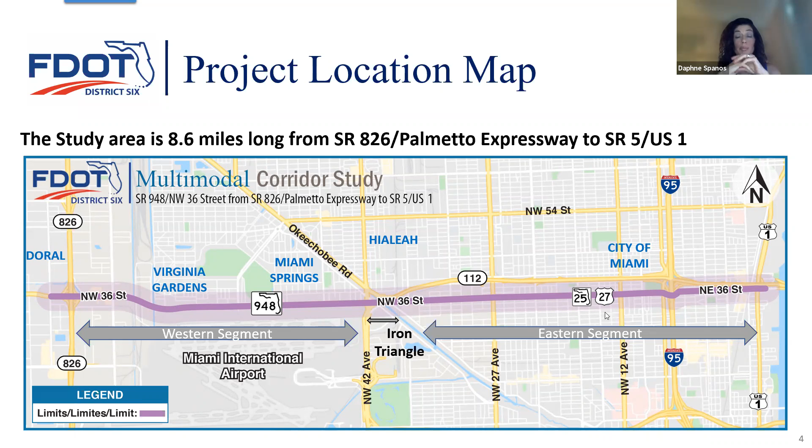But we start to see trends in these previous studies. A lot of them focus on optimizing the operations of the corridor, signal retiming, and looking at connecting the highways 112 to 826.

There's also freight studies relating to the corridor, as well as the county's long-range plan, the City of Miami master plan for bicycle and pedestrian, as well as the I-195 study, again a similar effort of FDOT.

Another member stated that the improvement should go further west than the Palmetto Expressway. Another TPO member asked if State Road 112 would be extended, and suggested extending over Perimeter Road instead of along Northwest 36th Street. There were also comments about keeping transit and bike lanes and support for mid-block crosswalks.

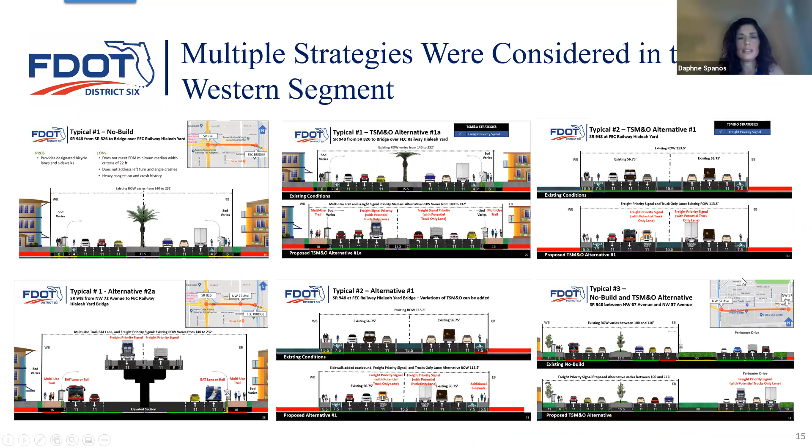So we're not going to go through all of these tonight, just showing the process of what we followed and what we presented.

In the eastern segment as well, we showed, I think, over 8 strategies in the eastern segment from 42nd to US 1, and then in the previous slide in the west, we showed about 15 strategies.

So from those strategies, we developed a preliminary matrix to see what strategies could possibly move forward for the purpose of our traffic modeling and following the rest of our engagement process as well.

Now you can click there. So we're going to discuss the alternatives. I see I'm on slide 12 and I think I have about 30 slides, so I'll try to be a little quicker, and then at the end, if anyone has questions, we can go back.

To summarize the alternatives, we have a no-build alternative, a TSM&O alternative. What we're calling a capacity build alternative is a 6+2 elevated section, and we're looking at that from 826 to Lejeune. Then a lane repurposing build alternative, again for the eastern segment, basically from east of Lejeune to US 1. In the middle piece there, as mentioned, the DOT has a separate analysis of the iron triangle of State Road 112, Lejeune, and 36th Street, and how that intersection operates. That would have to be integrated or looked at with any of these options.

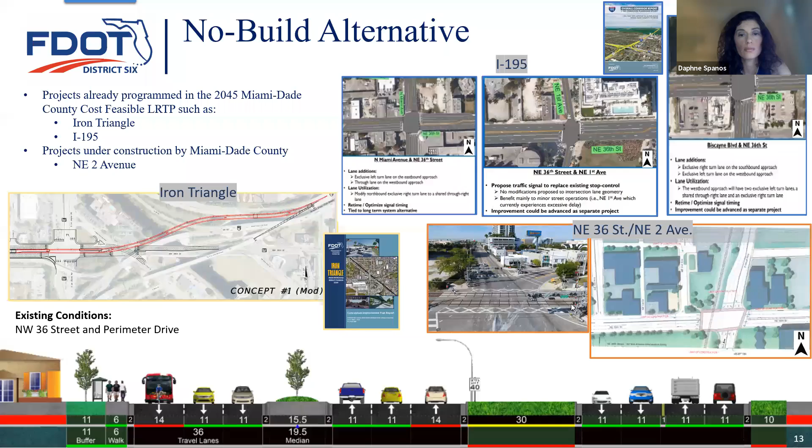So the alternatives are the no-build alternative. I forgot to mention the purpose and need of the study. The purpose and need looks at mobility enhancements, economic enhancements, safety issues, and accommodating all modes of travel.

For a no-build alternative, we could see that obviously it would be less costly than doing any build alternatives. It would be supported by Virginia Gardens and Miami Springs and less disruptive. The cons are that it does not address the full component of the study's purpose and need or future traffic conditions, which are showing to be failing in the West and in many portions in the East. And it wouldn't improve bicycle and pedestrian conditions, as well as the numerous high crash locations along the corridor, which are particularly located between Lejeune and US 1.

Next, we're going to describe the capacity build alternative, what we're calling the 6+2 elevated section. This is a rendering—whether a potential elevated section is in the median or the south side could be further explored. But this is what we're analyzing throughout this study process and modeling in terms of the traffic, looking at on a micro level how the intersections would be functioning. So this concept, in our study process, looks at from 826 to Lejeune, an at-grade six lanes on 36th Street with 2 lanes elevated.

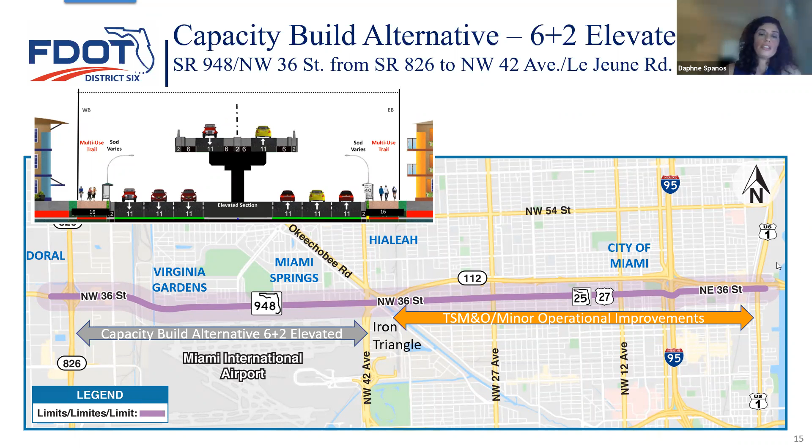I also should mention—well, I think the next slides will cover some of the points—this is just some conceptual renderings of how this could potentially look and how it could tie into the Palmetto Expressway, as well as how it would look along the Miami Springs and Virginia Gardens section. Obviously, if the section could have right-of-way impacts on the north side, unless the study team can tighten up and refine the concepts, they could potentially fit within the right-of-way, or there could possibly be right-of-way impacts.

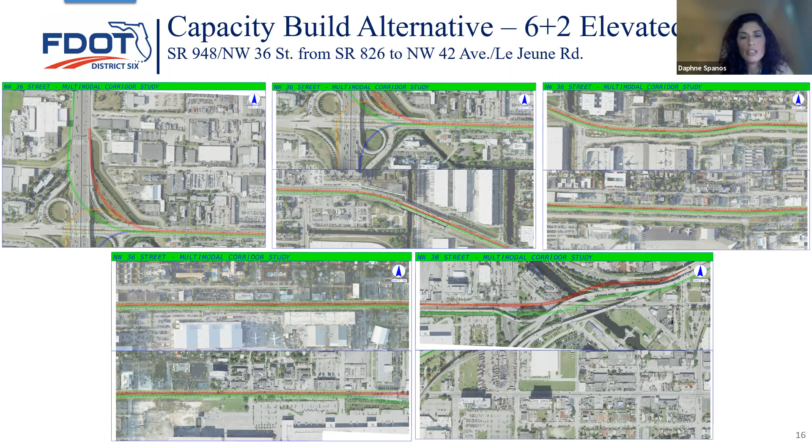And these are very, very initial conceptual renderings. So that's something that the study team is refining as we speak.

The pros and cons of this alternative: there have been previous studies and plans that have recommended it, both by the TPO in terms of the superarterial study and grade separation study. Milam Dairy Road, 72nd Avenue and 36th Street is a high crash location, and having an elevated component could help potentially mitigate that high crash situation.

Also, 36th Street is an evacuation route, so an elevated section could facilitate that, as well as it's on the National Highway Freight Network. And so there is a lot of freight activity on the corridor, especially with the intermodal logistics facility in the FEC Railway Hialeah Yard right adjacent to Virginia Gardens and Miami Springs. That facility is rather recent in construction, and there are a lot of movements coming in and out of that.

So there is a need also to address freight movement. And then there is potentially opportunity underneath any sort of elevated section to make a better and wider space for bicycle pedestrian facilities. The cons, as you can imagine, costly.

It is not favored by Virginia Gardens and Miami Springs. We've heard very negative feedback on this, and they've been vocal to us. We met with them Friday, and they continue to provide us with input that they do not want any sort of elevated section. And then there's concern about visual aesthetics, constructability, noise, pollution, and those are some of the issues they raised.

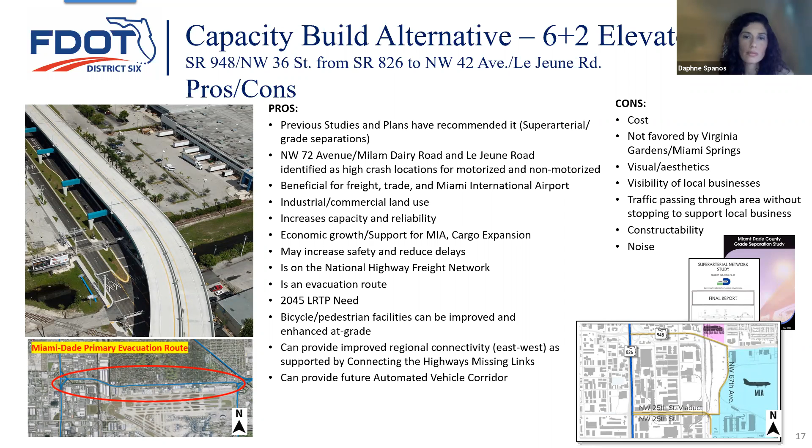So the lane repurposing, again, from east of Lejeune to US 1, could potentially use in the 4-lane sections of 36th Street, that extra lane for transit, bicycle, or on-street parking. FDOT upper management, we're not sure yet about the on-street parking situation, but that's something, again, that would be further refined to see how this can meet the purpose and need of the study.

And the reason why we're looking at this alternative is because, as we see it, the traffic volumes are comparable in the 4 and the 2-lane section. From today's standpoint, in the future, traffic congestion is expected to get worse. So we're not sure yet if this will be a viable option for future traffic conditions, but that's why it would need to go through that lane repurposing study.

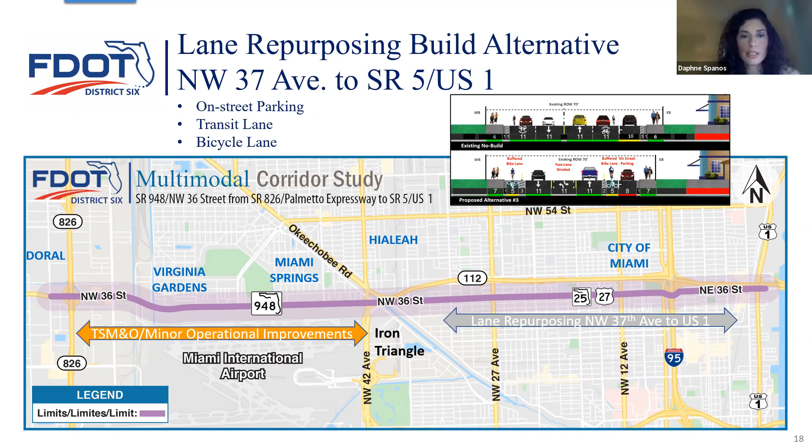And then we'll go through these quickly, but this is just a preliminary sketch of how it could look along a snapshot of the corridor for 25th to 23rd Avenue. So this is a transit lane, a bike lane. Then we can skip to the next slide.

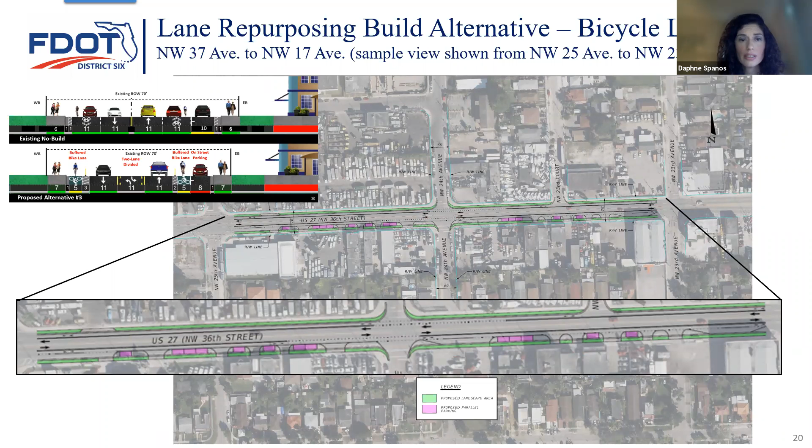And then the pros and cons of this alternative. The pros are it would help with economic development. You can see the graphics here of Allapattah and Wynwood, and this area is experiencing redevelopment, gentrification, and it appears like this kind of alternative would be supportive of the visions of these areas, as well as supportive of some of the local plans connecting to transit as well.

The cons are, as anyone can imagine, if you're taking away or using a lane of traffic for a bicycle parking or transit, it could obviously negatively affect traffic. So the traffic congestion could get worse, and that's a trade-off or a sacrifice that everyone would have to agree to if that's what the analysis shows. And then there would be cost and construction.

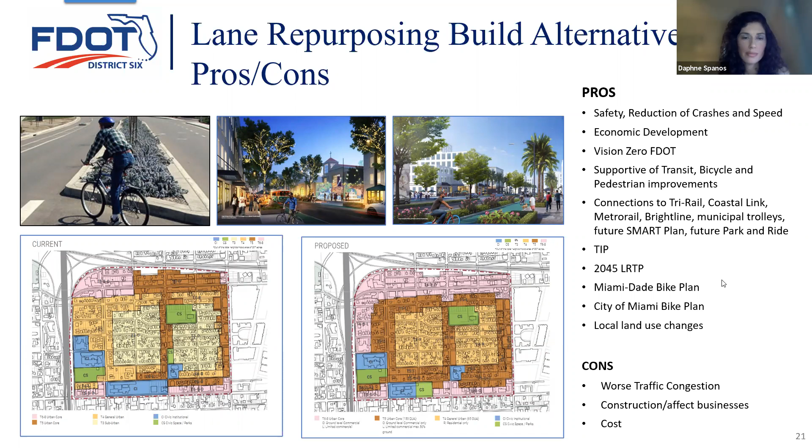Next, please. And then finally, the transportation systems management and operation alternative, which could be applied to the whole 8.6 mile long corridor. Next, please.

We've looked at preliminary strategies or improvements along the corridor from west to east on some of the recommendations that could move forward on a minor scale. Some of these are turn lane improvements, optimizing signal timing, converting some northbound approaches to left turn lanes. And so we have a whole kind of laundry list of strategies here that can be applied. These are more minor in nature and they're less costly as well. Next.

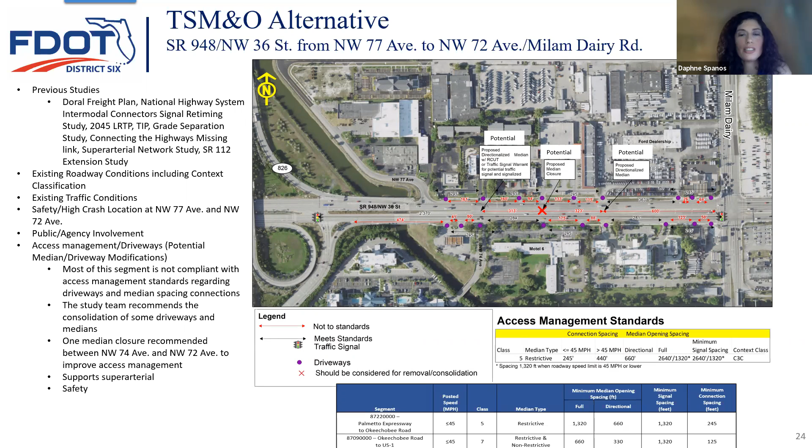This is a graphic depicting the corridor from 826 to Lejeune. There are issues here with high crashes, and people driving this corridor are familiar with trying to turn left and use the medians to get into businesses, which can become quite a mess. So there's potential to look at median closures or changing full median openings to directionalized median openings. This would help the corridor come more in line with FDOT's access management standards, where there are certain spacings recommended for driveways and medians, which right now it's pretty much non-compliant with.

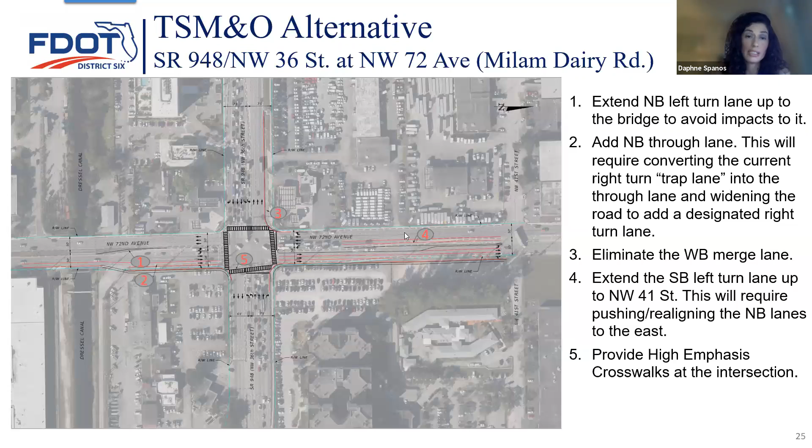We'll breeze through these. Again, these are showing some turn lane improvements at 72nd Avenue and what that could look like for TSM&O. The next one shows curb extensions, which would extend the curb so that pedestrians have a shorter distance to cross.

So for TSM&O, previous studies have recommended it. It's a low-cost solution favored by Virginia Gardens and Miami Springs. It can still meet some aspects of the purpose and need; however, it does not fully address the purpose and need.

So the next steps: what are we going to do? We're going to continue looking at the alternatives - the no build, the build alternatives, the capacity elevated 6 plus 2, the lane repurposing, and the TSM&O.